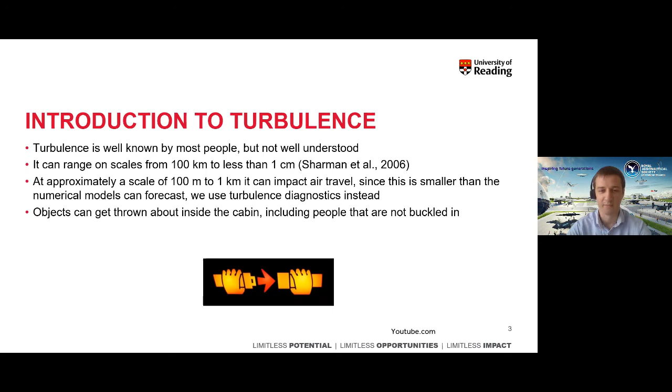Turbulence can be dangerous. Objects that are unsecure can be thrown around in the cabin, especially passengers if they're not buckled in. This is why it's particularly dangerous for cabin crew, because they're generally up and about serving drinks or the food meal service, and these are generally the people most at risk if you encounter severe turbulence. So I would always recommend that you wear a seatbelt if you're in the cabin, regardless of whether the seatbelt sign's on or not, just to be safe of any unexpected clear air turbulence.

And the impact on aviation, it costs the industry millions of dollars each year, paid out in compensation for people that have been injured, but also due to lost working hours from cabin crew. Because if a cabin crew member was injured during a flight, they're then not able to work for a period of time, and that costs up to 7,000 days per year in lost cabin crew time.

And most of these injuries occur above 10,000 feet, as generally the seatbelt sign is switched off. During takeoff and landing, the seatbelt sign is generally switched on anyway. So above 10,000 feet, when there's no expectation of turbulence, the seatbelt sign's off, and that's potentially where injuries can occur. I've just highlighted some examples here.

There was an American Airlines flight that was diverted to St. John's with injured passengers, and then an Air Canada passenger aircraft a few years ago that suffered 40 minutes of turbulence. So it happens fairly regularly where planes are having to be diverted due to encountering severe turbulence.

So what are the sources of turbulence? There are two that we don't really get into here, which is boundary layer turbulence. If you've ever experienced coming into land, it gets a bit bumpy nearer the ground - that's boundary layer turbulence, but generally the seatbelt sign is on for that portion of the flight.

And then there's in-cloud turbulence, where if you've ever flown through a cloud, you would notice that it gets a little bit bumpy. But again, pilots are able to visibly see a severe thunderstorm and therefore avoid it, or can see it based on onboard radar. Whereas clear air turbulence, which is in a region devoid of any clouds and cannot be foreseen by the pilots, is the one that is potentially most dangerous.

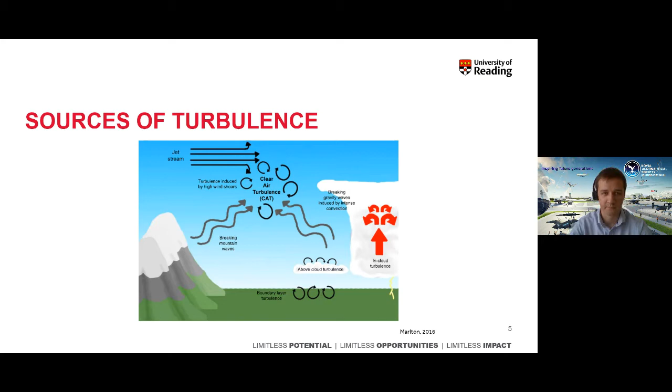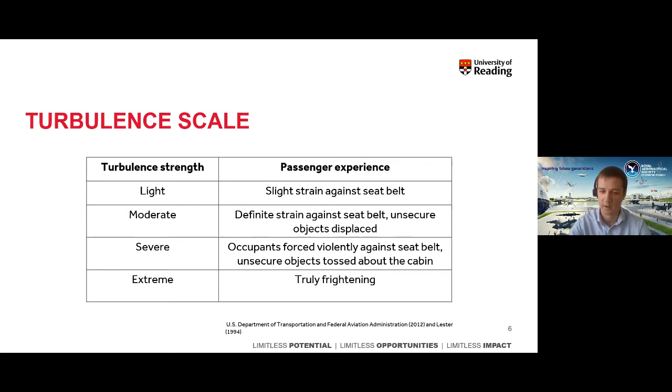So we categorize it on a scale from light to extreme. Light is what most people would experience on any day-to-day flight, a slight strain against the seatbelt. Moving through moderate, where you can definitely feel a strain against the seatbelt. Unsecure objects such as drinks might be displaced. But then severe and extreme turbulence is where passengers and any unsecure objects might be thrown around the cabin. This is the type of turbulence that we mainly need to focus on forecasting, because this is the one that would potentially cause injury to passengers and crew.

As I said, one of the main questions we got when doing some of this climate change analysis is how do the climate models perform in forecasting the location of turbulence? So we conducted an analysis that compared the climate model data from the Met Office's HADGEM2 Earth Systems output model compared to a reanalysis data set from the European Centre for Medium Range Weather Forecasts.

A reanalysis data set is one where it's almost like the best guess of what has historically happened. It's based on numerical simulations combined with actual Earth observations. So by comparing the climate model to what is the best estimate of what actually happened, we can compare and contrast and see how similar the climate model performs compared to the reanalysis data set.

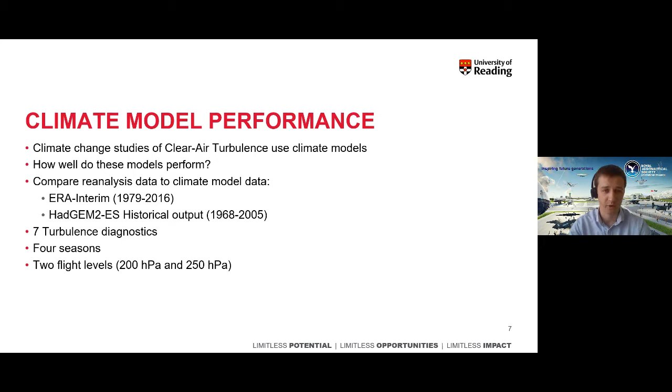And we did this for 7 turbulence diagnostics in all 4 seasons and at 2 separate flight levels, at 200 hectopascals and 250 hectopascals. This is equivalent to about 33 to 39,000 feet, so cruising altitude for commercial aircraft.

So the comparison, as I said, is the HADGEM2 ES, which is the climate model that we used, which has a lower horizontal and vertical resolution, versus the reanalysis data set. So we regridded the reanalysis data set to be on the same horizontal and vertical scale as the climate model, but also left it on its native grid as well, to compare the impact of resolution on the forecasted turbulence.

So we compared the global distribution, the percentage change distribution, so where historically turbulence has changed, and also what the percentage change is. So is the climate model over or under forecasting the percentage change?

So this is just an example diagram comparing 2 of the turbulence diagnostics. On the top 3, we have the Colson-Panofsky index, and on the bottom we have the Ellrod and Knapp turbulence index 1. The bottom index is one that has been used by the Met Office to forecast turbulence for many years. And we can see on the left of the 3, that's what the climate model predicts as the location of turbulence.

In the middle, moving left to right, is the reanalysis data set regridded to be on the same resolution as the climate model. And on the right-hand side, we have the reanalysis data on its native grid.

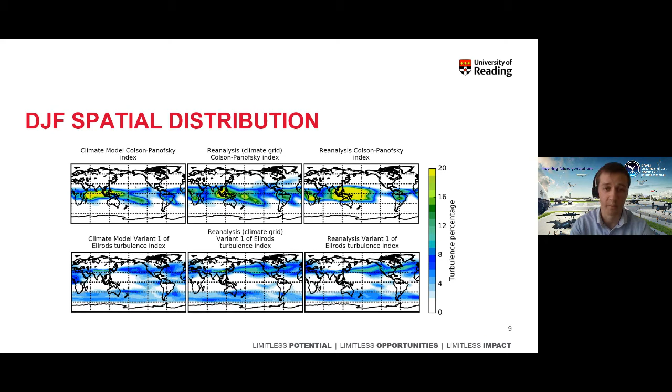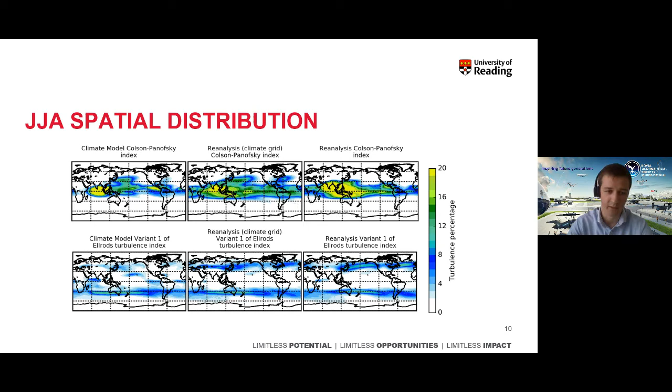We thought that was quite a big revelation, that the climate model is less of an issue than which diagnostic you think predicts turbulence the best. This was an example for December, January, February, the Northern Hemisphere winter. We can also compare the same for June, July, August, the Northern Hemisphere summer, which is winter for the Southern Hemisphere. The climate model performs reasonably well, particularly on the same resolution grid. Again, it's the spatial distribution between indices that is the largest discrepancy, rather than whether we use a climate model or the reanalysis data set.

Here's a plot of the percentage change in turbulence, comparing the first half and second half of the data period we looked at. We can see that the location of forecasted change, particularly around the equator, is much larger in the reanalysis data set than in the climate model. This suggests that in further studies, including the climate change modeling we conducted, we might be underestimating the change in turbulence around the tropics, around the equator. But looking more towards the mid-latitudes, the climate model performs better, though the exact location is not perfect, and again it might be a slight underestimate.

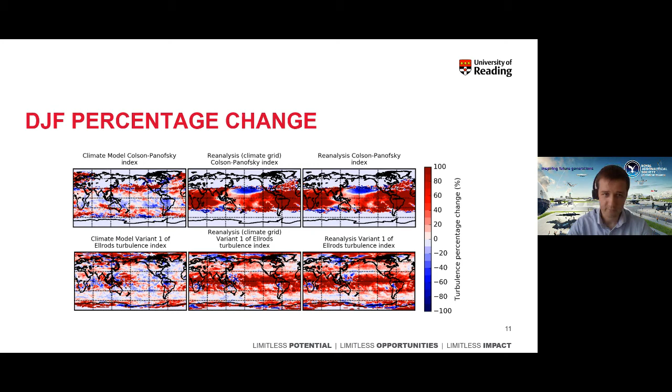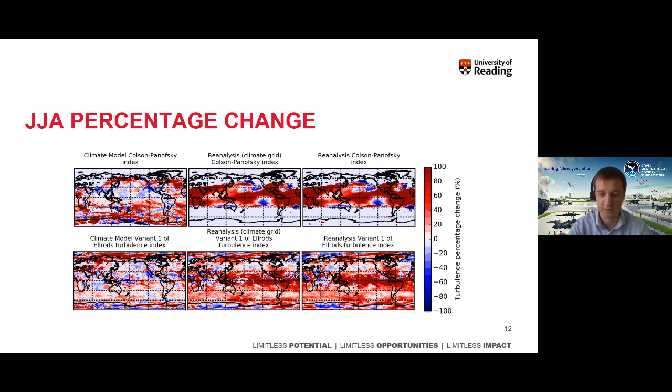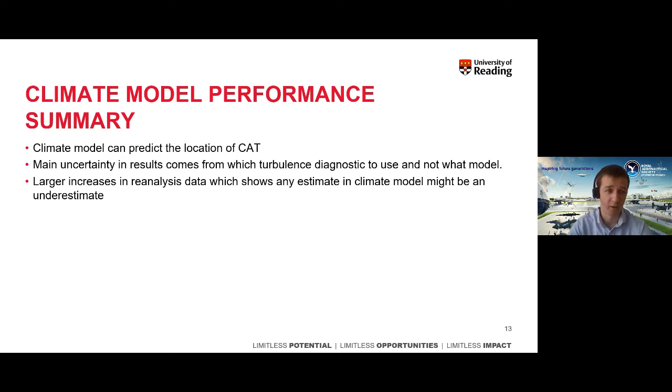So in summary, climate models can predict the location of clear-air turbulence, and the main uncertainty comes from which diagnostic to use, not which model we might use. There are larger increases in the reanalysis data that suggest any estimates we make in a climate model may be underestimated. Following on from that, we did conduct a climate change study.

This followed on from work that Professor Paul Williams had done at the university already. He looked at a study of the North Atlantic, so we expanded this further to see whether climate change will impact turbulence globally in all seasons and at multiple flight levels. We used the same climate model as before, the HADGEM2 Earth Systems climate model from the Met Office, comparing a pre-industrial control base, before the Industrial Revolution, to RCP 8.5, the high emission scenario based on the Intergovernmental Panel on Climate Change's highest emission scenario. Obviously this is subject to social political debate as to whether we should use a different scenario, but we chose the highest emission scenario to test for sensitivity.

We looked at 20 separate turbulence diagnostics and set a threshold, counting the number of hits above this threshold. When comparing the pre-industrial control to the climate change scenario, if we see more hits above the threshold, we'd say there's more frequency of turbulence events, and therefore more turbulence as a result of climate change. We looked at 4 seasons and 2 flight levels and calculated the percentage change between the two time periods.

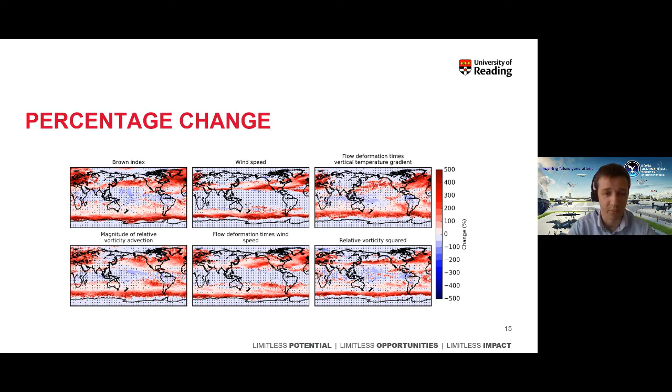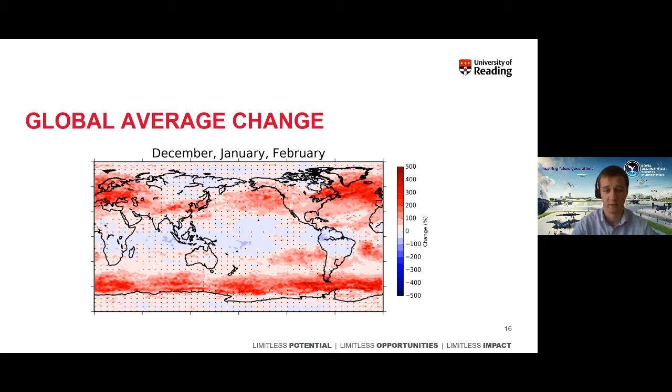So what we did is combine all 20 diagnostics, assuming each turbulence diagnostic was equally likely to be true, just doing a simple average of the percent change for each grid box. We see again the North Atlantic, Europe, North America sees a very large increase in turbulence, over 100%, meaning it would double compared to the pre-industrial control period. We also see in the Southern Hemisphere, around the southern jet stream, large increases, with an expected increase in wind speed to the jet stream, and therefore changes in turbulence as a result.

So just to highlight some of the percent changes, we looked at the North Atlantic and Europe. We have 5 turbulence strength categories: light to moderate, moderate to severe, and severe, at 2 different heights in the atmosphere: 200 hectopascals being about 39,000 feet, and 250 hectopascals being about 33,000 feet.

We see that in general, the more severe the turbulence, the greater the increase in frequency. And as we said right at the very beginning, severe turbulence is one of the more dangerous and potentially harmful

to passengers and crew on board. It's expected potentially over the North Atlantic at the upper flight level to be a 185% increase. This is essentially a tripling of turbulence compared to the pre-industrial control. This is true also of Europe, and is true also around other parts of the world, but I've only highlighted these 2 here.

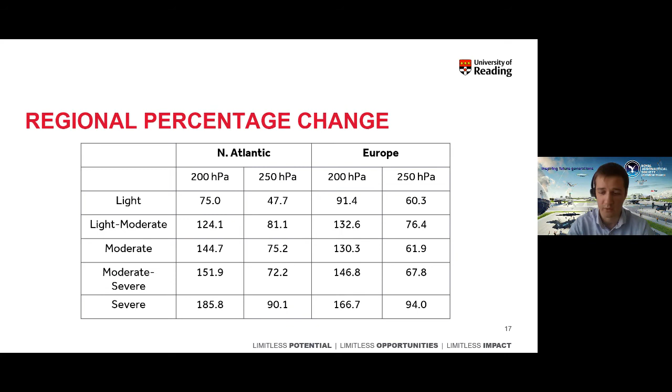So just to summarize, turbulence is set to increase with climate change. That was known before from previous studies, but this is expanded to be not just moderate turbulence, but all turbulence strength categories at multiple flight levels and around the world. And the increase is strongest at the higher flight altitude, so 39,000 feet.

And we wanted to provide some context as to what this would actually feel like, because saying that there'll be a doubling in turbulence doesn't necessarily mean anything to anybody that doesn't fly regularly.

So the context is, in winter, severe turbulence by the middle to the second half of this century will be as common as moderate turbulence is in the control period. So if you've ever experienced moderate turbulence, you more than likely will experience severe turbulence by the second half of this century.

And for a range of turbulence strengths, summertime turbulence will be as common as wintertime turbulence in the control period. So we know that in general, in winter, the jet stream is stronger and therefore there's more turbulence. So we would expect summer to be as frequent as winter, and winter to be even more frequent than it is currently. This just emphasizes the fact that flight planning may become more important in the future.

And that's where we provide the motivation for trying to improve turbulence forecasting.

So how do we currently forecast turbulence? Operationally, at the Met Office, they use a single turbulence index to produce a deterministic, so a single forecast, of where they expect turbulence to be. This is a shear turbulence index only, so it doesn't forecast convection.

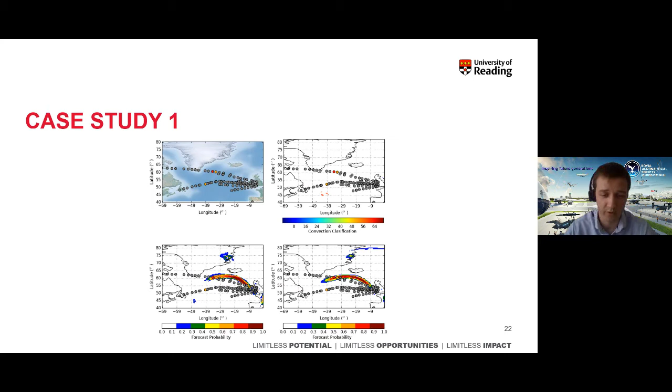In the bottom two tiles, we show the ensemble forecast we produced from the Met Office and the ECMWF. Both forecast centers predict turbulence in the area where turbulence was observed. Because both models predict turbulence, we have quite high confidence that there was likely to be turbulence in that region. And as we see, the verification showed that there was turbulence there. So that was a hit, and that's exactly what we would want to see when producing this turbulence forecast.

This is one of the reasons why we would want to expand this trial to include convection and mountain wave turbulence as a forecasting predictor, but that's something we'll come on to later. So this might be classed as a miss, because our ensemble forecast system was unable to predict this mountain wave turbulence event.

So how we measure the forecast skill is to plot a relative operating characteristic plot. When we produce a forecast of turbulence, we categorize it: whether it was a correct positive, meaning we forecasted turbulence and turbulence was observed; or we forecasted turbulence and turbulence was not observed, which would be a false alarm; or we didn't forecast turbulence and turbulence was observed, which would be a miss; or we correctly didn't forecast any turbulence, which would be a correct rejection.

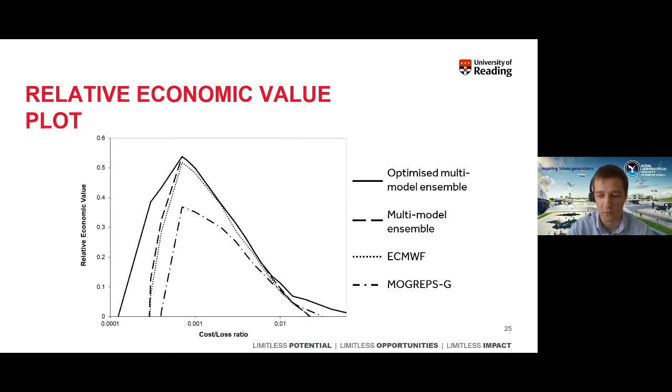So we'd say here that the multi-model ensemble is more valuable to an end consumer than the individual ensemble forecast system. That's why we'd say it's almost like a success - this is better than an individual ensemble forecast. And this is a reliability diagram.

For example, if you forecast a 1% probability of turbulence, you would expect to observe turbulence 1% of the time. And we can see that all three ensemble forecasts are pretty reliable.

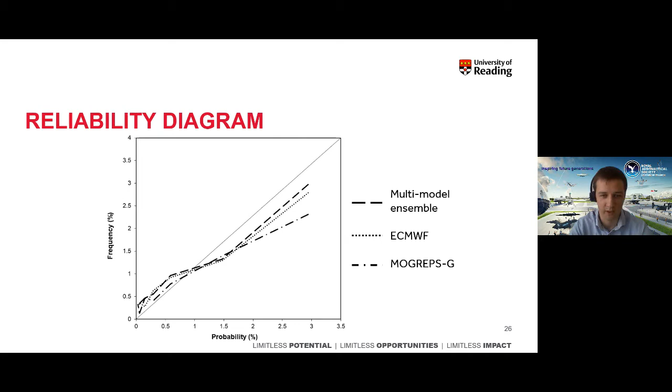So this is the single diagnostic ensemble. It is more skillful, but not significantly. But the multi-model ensemble is more valuable. As we showed for that case study, we need to include other turbulence indices - a convective index, maybe a mountain wave turbulence index, and other shear turbulence indices - because the Ellrod turbulence index is unable to forecast every type of turbulence. So that's when we move on to a multi-diagnostic trial.

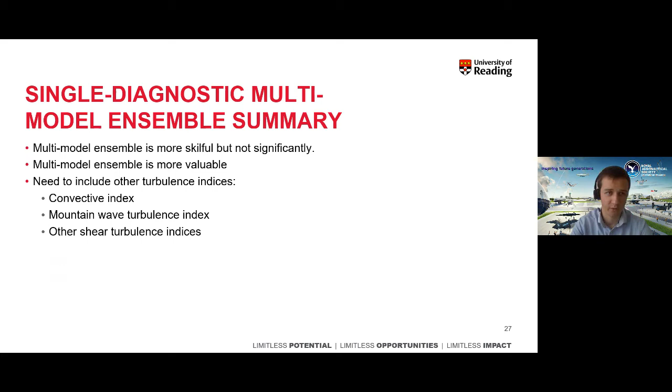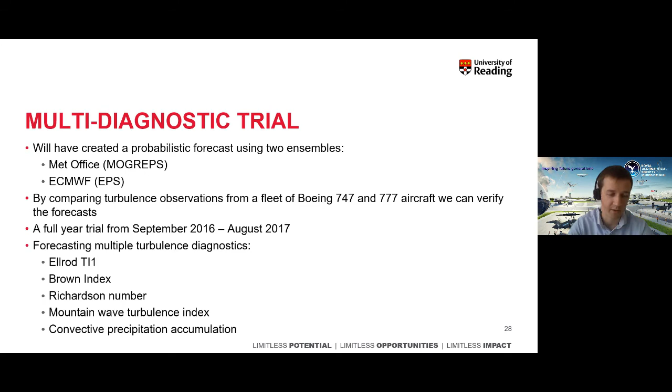In the multi-diagnostic approach, we use multiple forecasts of turbulence for different indicators, then rerun the exact same trial - using the same ensemble forecast systems, comparing the same flight data from the fleet of 747 and 777 aircraft for a full year. This time we look at the Ellrod index, Brown index, and Richardson number, which are both shear turbulence forecasts. We also include a mountain wave turbulence index and convective precipitation accumulation, which we equate to deep convection, and therefore a forecast of thunderstorms essentially.

What I've plotted here is essentially a rerun of the previous trial - a single diagnostic multi-model ensemble. We can see again the multi-model ensemble has a higher area under the curve, which, as I said before, means a more skillful forecast. But using the significance bar - the whiskers of this plot showing 95% significance - it's not significantly better than a single model ensemble. Again, the ECMWF forecast comes out slightly more skillful for each of the individual diagnostics than the Met Office's forecast.

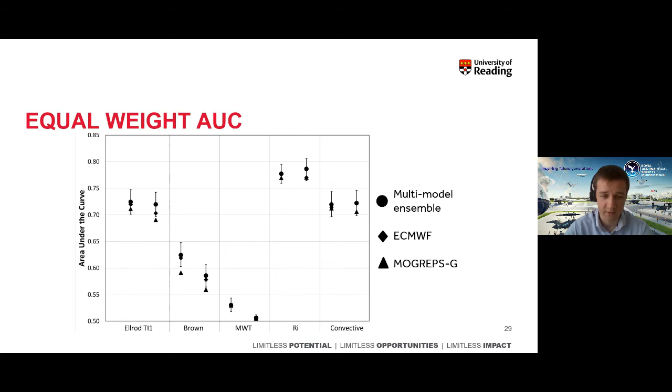So this is a plot to show the multi-diagnostic ensemble aspect. The blue bar is a multi-diagnostic single model ensemble - multiple, all 5 of the turbulence diagnostics for the ECMWF ensemble forecast system. The orange is the same: all 5 turbulence diagnostics for the Met Office's ensemble system. And then the green bar is a multi-diagnostic, multi-model ensemble.

The two grey bars show the significance again. We'd want the light grey bar to be above both the blue and orange to show that it's statistically significant, but unfortunately we're unable to do that here. What we do show is that for this example, the Met Office is more skillful than ECMWF, which contrasts with what we showed before, where for the individual diagnostic ECMWF performs better, but when combining diagnostics the Met Office performs better. Again, the multi-model ensemble performs better than both individual ensembles.

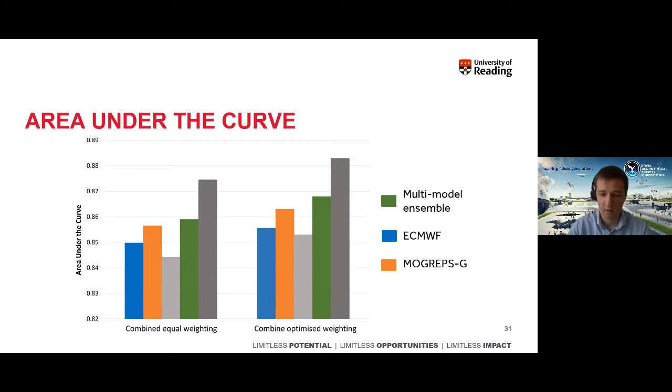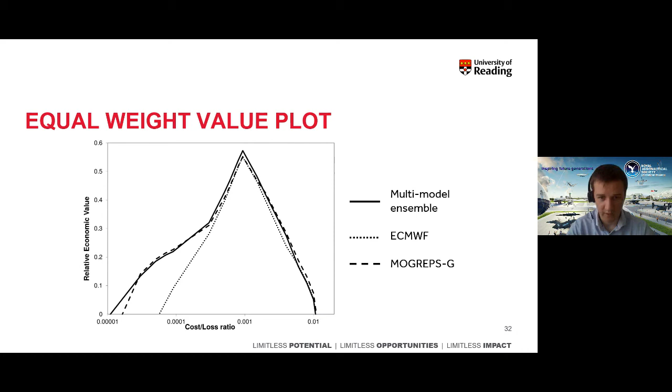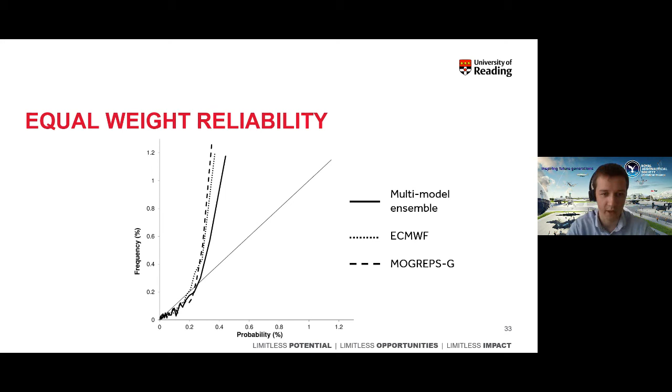Because we showed that the Met Office was a better ensemble forecast in a multi-diagnostic context, we hypothesized this was because it had fewer ensemble members. The ECMWF ensemble forecast system has 51 ensemble members, whereas the Met Office only has 12. To understand whether ensemble size matters, we reduced the ECMWF to have the same ensemble size as the Met Office. If we take the first 12 members, we can assume that each ensemble member is equally likely, so we just take the first 12 members and produce a forecast.

Again, we see the Met Office is generally slightly worse for an individual diagnostic ensemble, but the multi-model ensemble is better than both individuals again. But when creating a multi-diagnostic ensemble, the Met Office outperforms ECMWF again, and as before, the multi-model ensemble is more skillful than both the individual ensembles.

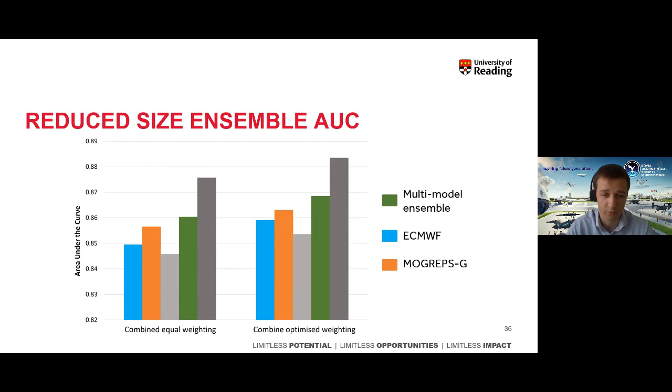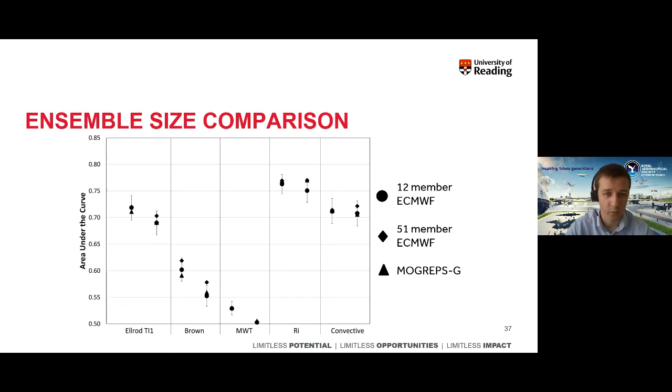To compare this, this is a plot where the circle is the 12-member ECMWF ensemble forecast, the diamond is the 51-member ECMWF ensemble, and the triangle is the Met Office. We see that for an individual diagnostic ensemble forecast, the 51-member performs best, with the 12-member ECMWF and Met Office performing slightly worse. However, when we combine diagnostics, as shown before, the Met Office outperforms the 51-member ECMWF, and actually the 12-member ECMWF forecast, when optimized, outperforms the 51-member ECMWF.

This result suggests that fewer ensemble members in a multi-diagnostic, multi-model ensemble might be better than a higher number of ensemble members. I think this requires more analysis as to why. Is there an optimum number of ensemble members? Is it that we haven't been able to optimize the 51-member well enough, and actually we can provide more forecast skill? That's something we weren't able to answer in this study, but it would be interesting to find out the answer.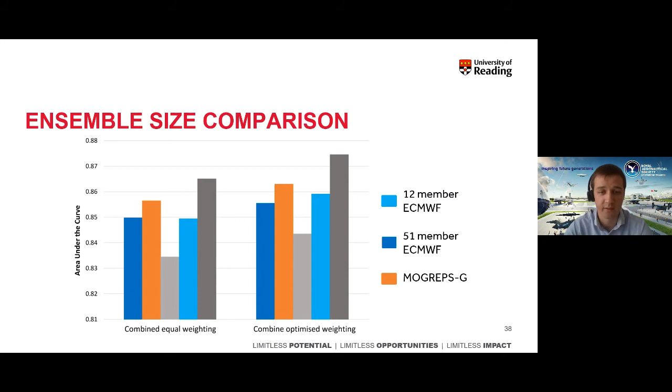To summarize, the multi-diagnostic MOGREPS ensemble is more skillful than the ECMWF, and the multi-diagnostic multi-model ensemble is more skillful than both the individual ensembles, which was the point of this study. We wanted to show that a multi-model ensemble is better at forecasting turbulence than an individual ensemble, which studies have already shown is better than a single diagnostic forecast. Actually, we showed that a reduced size ECMWF ensemble gives a more skillful result, and further work is required to understand why that might be, and if there is an optimum number of ensemble members.

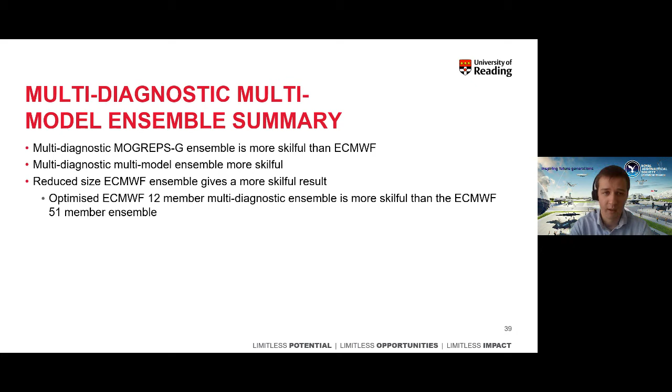So to summarize what we've covered here: climate models can predict the location of clear-air turbulence. In the following study, climate change is set to increase clear-air turbulence globally in the future, with some regions such as the North Atlantic more than doubling. We also showed that the multi-model ensemble is more skillful than a single model ensemble, but not significantly so. But a multi-diagnostic multi-model ensemble is more skillful than that, with potentially a reduced size ECMWF ensemble giving more skill.

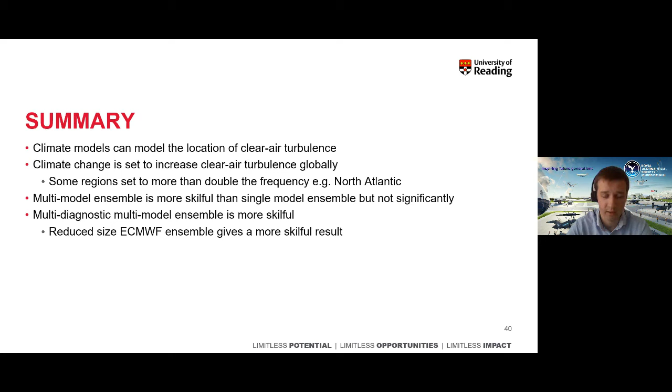Thank you, Luke. Can you all hear me? I presume you can. Very interesting, very dense as well. For some of us, we can definitely see that there's been a lot of work and a lot of number crunching behind all this research. I've got quite a few questions in the Q&A panel, so I'm just going to pose them to you. Hopefully I'll do justice trying to translate the comments that I'm getting here.

I've got a couple of questions from Robin Ricks. These are related, so I'm going to read them both together. He says aircraft are fitted with lap seatbelts and cars are fitted with 3-point inertia seatbelts. Would similar seatbelts as used in cars help? He also says that since experiments at Farnborough, the RAF seats in transport aircraft face the tail. So would both of these measures, the car belts and the rear facing, help safety during heavy turbulence?

I think this isn't necessarily a question that I can answer, because I've focused on turbulence forecasting as a way of mitigating turbulence, and that sounds more like an engineering type question. But I would imagine, I think on some aircraft, for example British Airways, I believe in business and first class, they've introduced a 3-point seatbelt, but that doesn't mean it would be better for turbulence necessarily. I think any seatbelt is better in severe turbulence. I'm not sure if turbulence is severe enough that it would require a 3-point harness, but I guess that's for the experts conducting those experiments to say. I really wouldn't know and wouldn't want to speculate without seeing the evidence myself. So sorry. Thank you.

I think it's wonderful that you've managed to combine your passion and really enjoy it very much. It really shows that you enjoy what you're doing, Luke, and it's contagious. I think it's reassuring to know that turbulence is not a typical cause of airplane crashes, not something we should be too worried about. It's also reassuring that there are people like yourself using your great mind to help us understand and forecast and better plan ahead. So again, Luke, thank you very much for being with us. I've got questions I've not been able to ask you, but I'm really delighted to have had you with us. I hope we can see you around in the Royal Aeronautical Society Heathrow branch again. Thanks for your time.